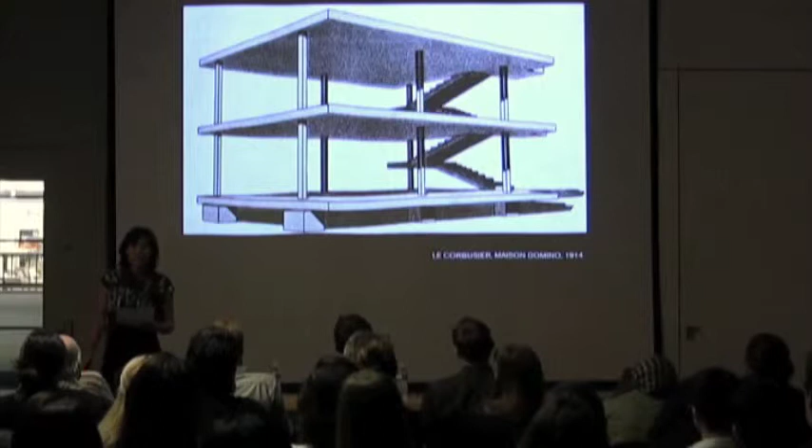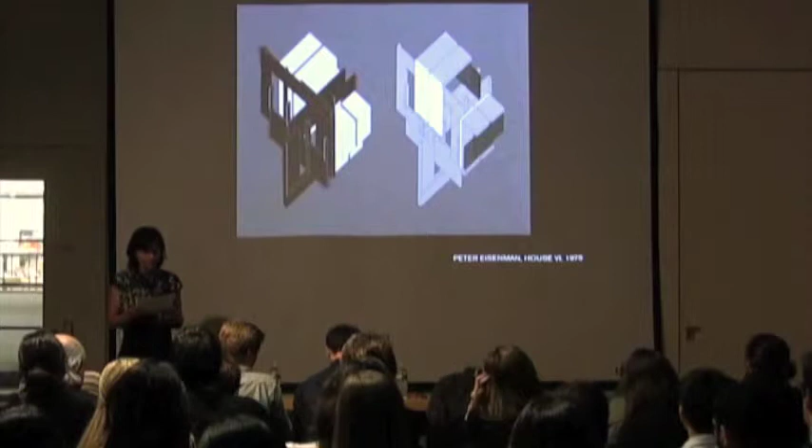Despite the last contestation of meaning that was produced by postmodern thinking in the West, where a large number of architects brought back the question of symbolic representation in an effort to undermine modernism's claim that form followed function, either through postmodern architecture's renewed commitment to symbolic meaning understood as relative, referential, and historical, such as with the iteration of its architectural elements, or through a re-engaging of the urban landscape as one of signs and symbols, or through deconstructivist architecture's untangling of the relationship between form and function, rendering stable meaning and functional legibility impossible, either replacing the legibility of symbolic reference by a legibility of process through formal deconstruction, or again, through the unlocking of the form-function equation by focusing on function as event, to be reinvented and often represented as a fragmented and destabilized body, such as with Tschumi's work.

Or again, by flipping the modernist plan into a section that allows an endless ability to produce surrealist effects, a manifesto against the conscious production of collective meaning, as it both connects and separates highly disparate programs.

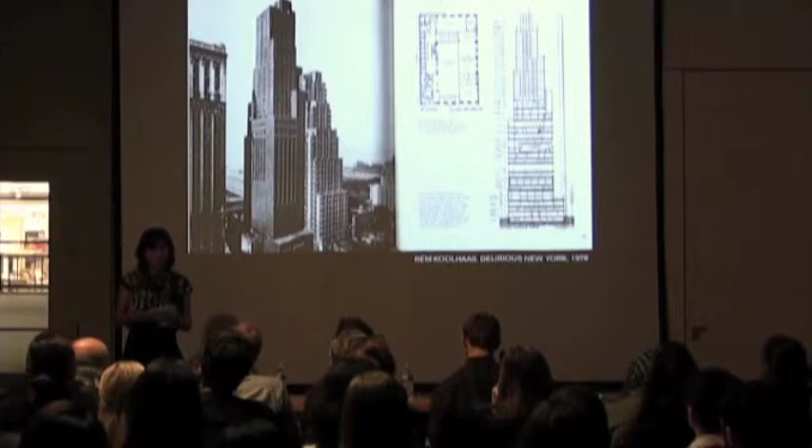Interestingly, 1978 is the same year that Delirious New York was published, and Edward Said publishes his Orientalism, which instead finds and deconstructs meaning in all of the representations of the Orient, always and collectively depicted as inferior, irrational, and only animated by religion.

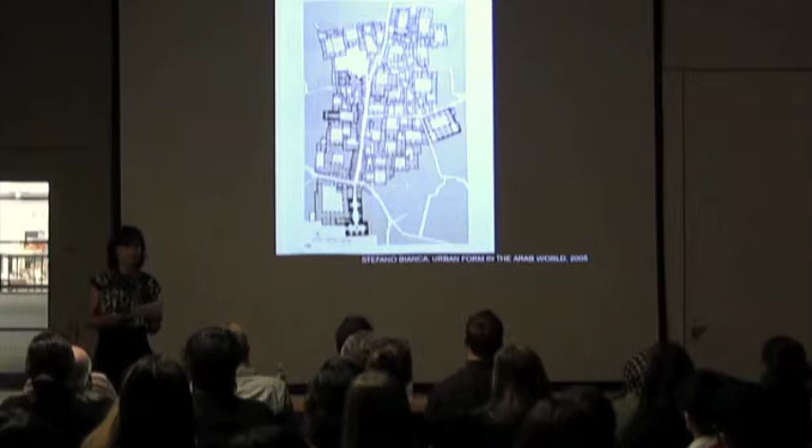So everything from interior work to entire cities is defined by this lens of the religious. Today, with the prevalence of global practice, it seems that meaning is again everywhere, but nowhere engaged as critical discourse, with no clear debate as to the content that we as architects continue to produce.

We all know the drill. In China, you either try to produce a kind of figure 8 or a symbol that means the people. You can engage with stadiums as the metaphor bird's nest, the building as a kind of sail, evoking the historical past of fishing for pearls in the Gulf states. In Africa, you go tribal patterns.

And even when meaning is not intended, it is expected and projected onto contemporary production. This situation is particularly bad, I would say, in the Middle East, where orientalizing plans and buildings - for example, a museum as flower of the desert or as oasis, the contemporary city as traditional Arab city, and the idea of the pattern no longer generative but entirely decorative, etc. The condition has become really absurd.

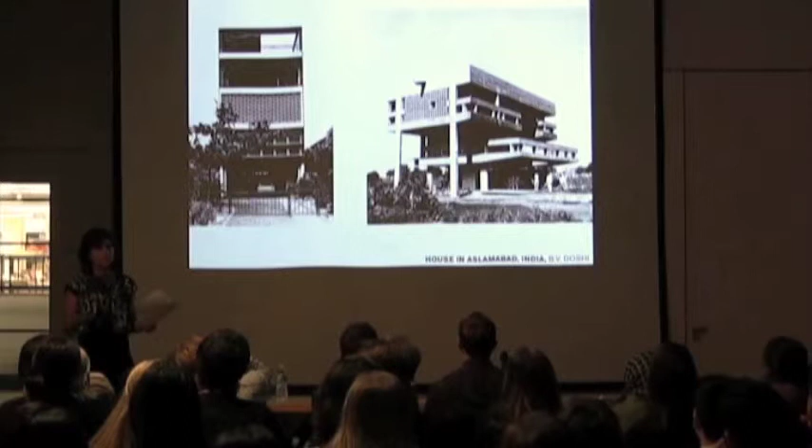This condition of patient negotiation, of exchange, of subtle etiquette, a mix of idealism and pragmatism, and slight compromises that come to new resolutions and new positions that go beyond the first two that are already known - this condition I'd like to describe as diplomacy, which is often for us represented by some of the more beautiful embassies that negotiated cultural difference.

The condition of diplomacy and representation, as embedded within an imperative of cultural diplomacy for architecture, is not one of unconditional engagement.

For us specifically, and for the past 5 years, this conversation has revolved around the environment, or at least an idea of representing, exploring, and possibly reinventing the relationship between the urban, the rural, and the natural as they intersect with the architectural.

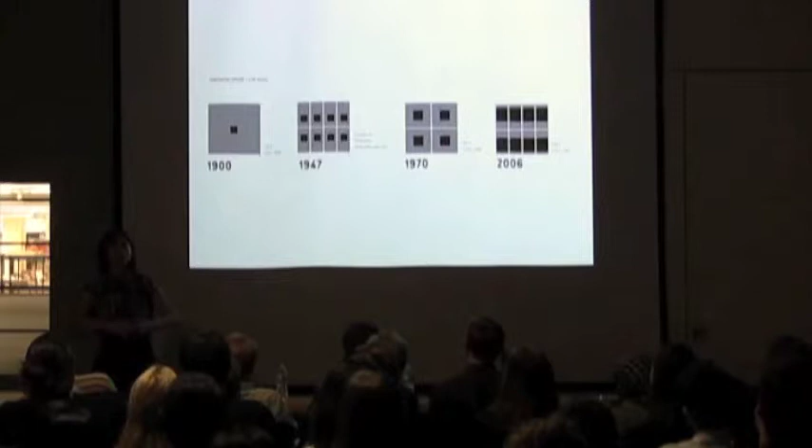Some of the ideas we were interested in was really understanding the relationship between the built and the unbuilt in the way they evolved, where the ratio of green to gray, what each house comes with as a lot of green, has evolved to become incredibly dense, where the scale of the house and the scale of the green have gone in opposite directions.

The second important point was how could we expand the typologies of housing in the typical American suburb, which are quite limited and usually dictated by mortgages and banks, etc.

So Keizer is a typical American suburb, as you would imagine it, a sort of bedroom community for Salem, which is the capital of Oregon, and also for Portland, where people commute to quite often.

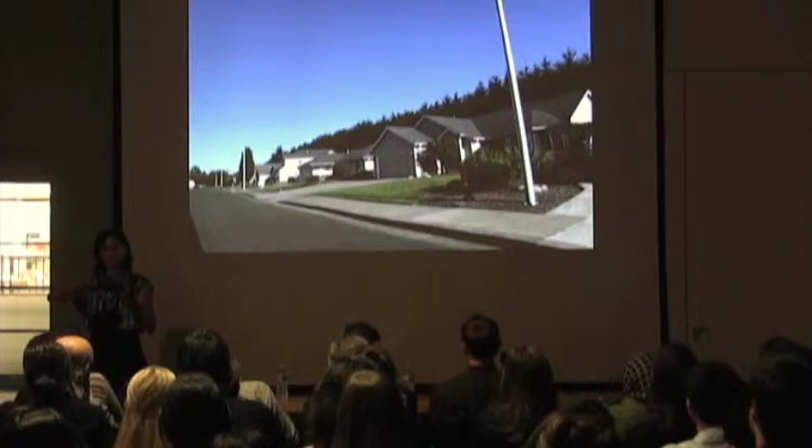It was also very interesting for us because Oregon is the only state that works with urban growth boundaries, and you can still read it in the landscape, and that was the site we chose. The problematic that was interesting for us is that at the time Keizer was in negotiation with Salem to expand the urban growth boundary, with the idea that 13,000 people were going to move to Keizer in the next 20 years, and that they didn't want to densify.

So that was an obvious problem. Could we maintain the quality of life that people who move to Keizer want while densifying and maintaining the urban growth boundary, which is kind of ground zero for a negotiation between the urban and the natural, as we would like to claim it is, or it should be.

Here you can actually see in Keizer that urban growth boundary and that strong edge really functioning. Our site was a shopping mall that had been developed in recent years, so it was easy for us to imagine an alternative to this.

So really thinking about the idea of density, of edge, of a strong negotiation between the built and the green, we imagined that the minimum of urbanity would be 2 streets, and that if we took the grid as the sign for the urban and stretched it, we could create a diagram of grid, green, grid, green, grid, green. While the grid was working in the east-west direction, the north-south would be much thinner and more natural, where the green would be able to pass over and under and create a new type of grid.

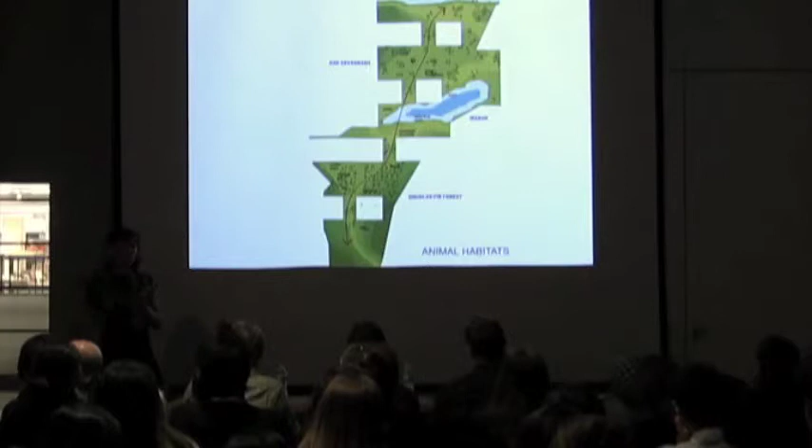That was the kind of numbers of what we were able to create with that diagram. Here you see the idea of the north-south green movement versus the east-west, much more urban context.

The idea was also to try to differentiate the green, so it ranged from landscapes that would need very little tending, quote-unquote wilder, to a series of much more domesticated landscape connected to different typologies of housing, creating diversity not just of housing, but of landscapes within each kind of block.

The section became very important. How do you pass nature, quote-unquote, underneath, over? How do you embed it within? That was one of the main pieces that was developed.

And here you see each block highly diverse in terms of the typology of housing that was created, but also the typology of green that was inserted within.

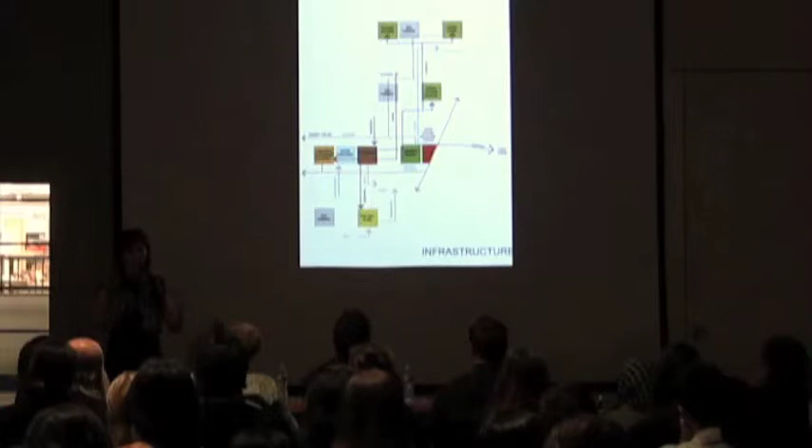The idea also for the housing, in terms of diversifying the typology, was that each housing block would also double up as what we call the ecological infrastructure for the site. Meaning if you were going to live in a much more natural environment, you would need to do work for that to be sustainable. So everything from composting to a fuel cell plant to geothermal capabilities - the housing was also the infrastructure that allowed the whole development to exist in an integrated way.

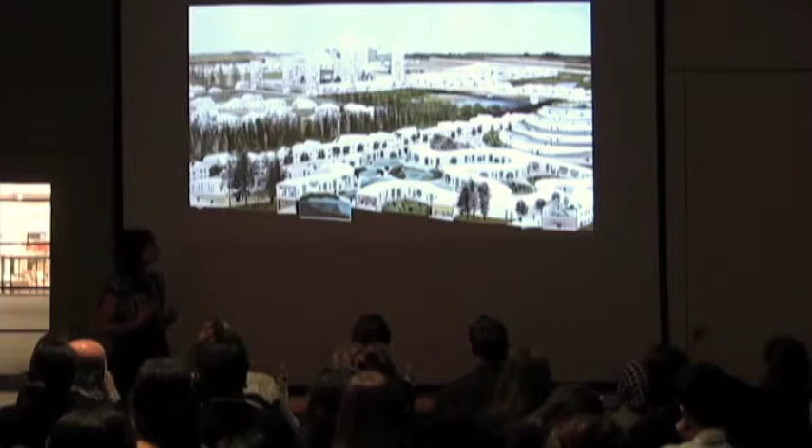That idea of housing as infrastructure generated these new typologies. For instance, this was the water filtering system where instead of a lawn, you would have a pond of water that would also filter the water, so you have a view on the lawn and a view on a little pond.

As you can see here with this thin ribbon negotiating the green and the water - looking at distribution of water and densifying right at the moment where trains would come.

We had the water towers where the pressure of the water would be created by the interior of the water tower as the water fell. That was a way to reinterpret the core and expand it to become much more of an experience of systems and a celebration of them.

Again, working with the typology of a typical suburban home, but now stacked, either stacked or compressed. The big compost mound was where all of the organic waste would come, be composted, produce methane, etc.

That particular typology was interesting for us because it doubled where one ring would be entirely public, so you could actually go up, and the other ring would be more private. A real weaving of the two systems as you moved up - we called it the continuous dog run on the one hand, and then the more private green spaces on the other.

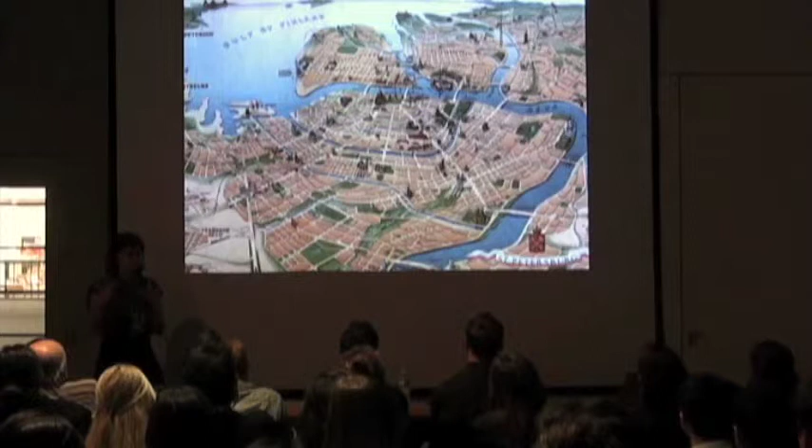Interesting triangular island, which Peter the Great carved from the city, and was always, in a way, a void in the city because it was always connected to military operations, always inaccessible to the public - this very mysterious site in the heart of the city.

It's a World Heritage Monument site, highly protected with very strict guidelines in terms of how it would be restored.

Our competition came right after another competition which Foster had won, where he proposed a huge building in the center of that void for a cultural center, and had already started to demolish some of the island's structures. So we came in with a sense that it was a void that needed to be preserved, and thought about how we could work with that idea of the void as a way to produce new architecture.

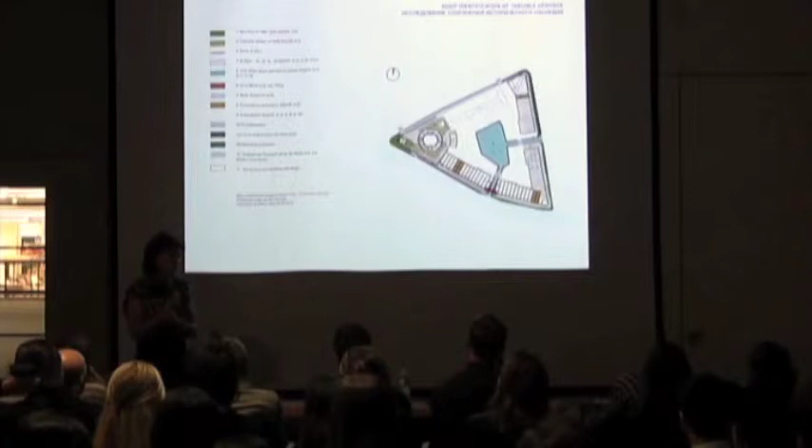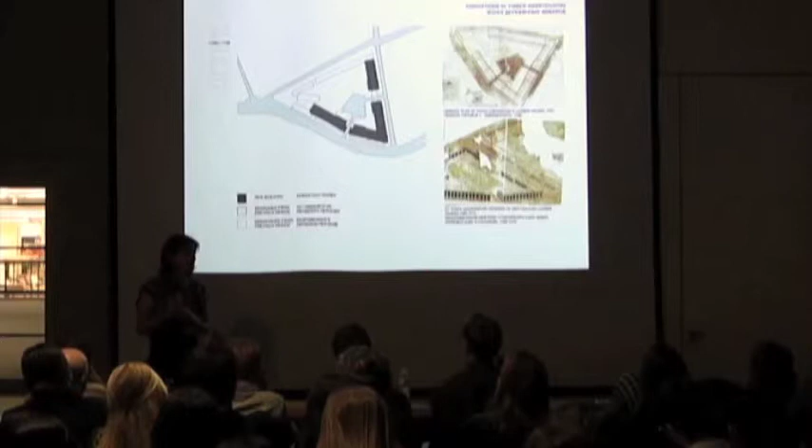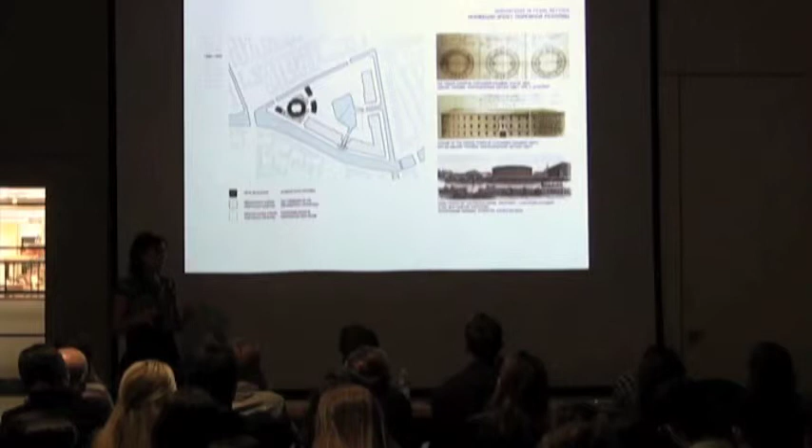Very interesting history - from Peter the Great carving it out from the city, to creating these warehouses used to dry wood for building ships for the Russian Navy. The first reforming prison, a circular building, was built on the site, and Mendeleev discovered the table of elements there, in a big lab with a big pool - one of the buildings that Foster demolished when he started work.

One of the things that was really fascinating about Mendeleev was his interest in the transformation of elements, and he was obsessed with balloons, as we discovered after winning the competition. We had actually proposed a balloon during the competition, and it was interesting for us to engage with these strategies of transformation that are not permanent.

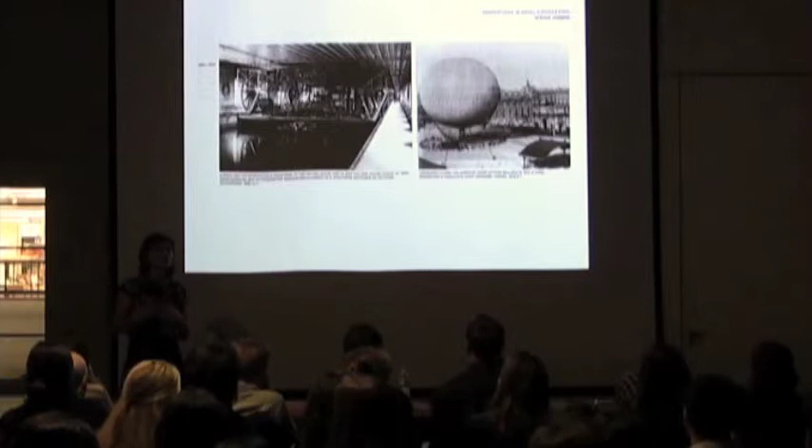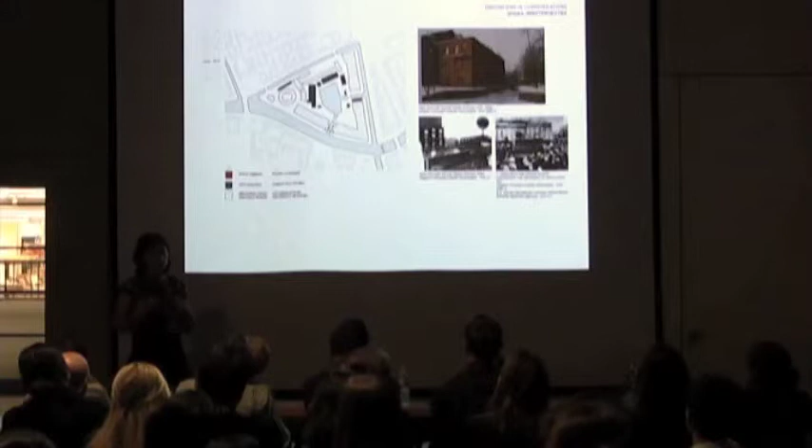This was another building that was really interesting and had gotten demolished - this was where Lenin first declared victory of the revolution, from this radio station. So there was a lot of interesting history to uncover and bring back in non-architectural, atypically architectural ways.

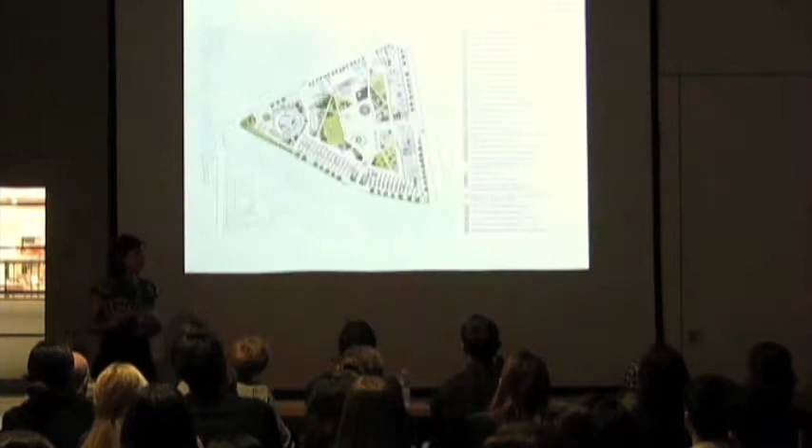Our first instinct was to really open it up to the public and create a park. That would be, in a way, the most radical gesture - giving access to the people of St. Petersburg to this island, which had been a fortress for so long, and to create this park and make it usable throughout the summer, but also throughout the winter.

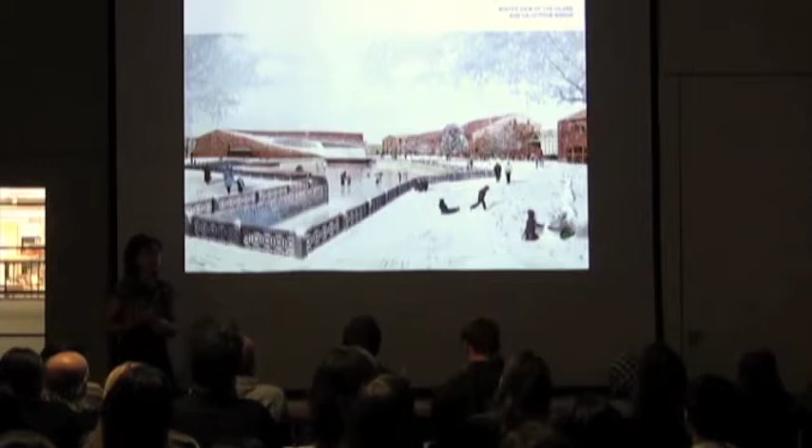One of the ideas was how to keep it alive even during winter, and how to bring the idea of the park into the interior of the warehouses. The warehouses are quite amazing because of the need to dry wood vertically - they're built with this amazing structure that creates a very intense rhythm where the wood would be placed vertically.

There was already this notion of density, and as the island was carved from the rest of the city, we could carve voids through that density to create new kinds of public spaces. So we were working in between two strategies of the void.

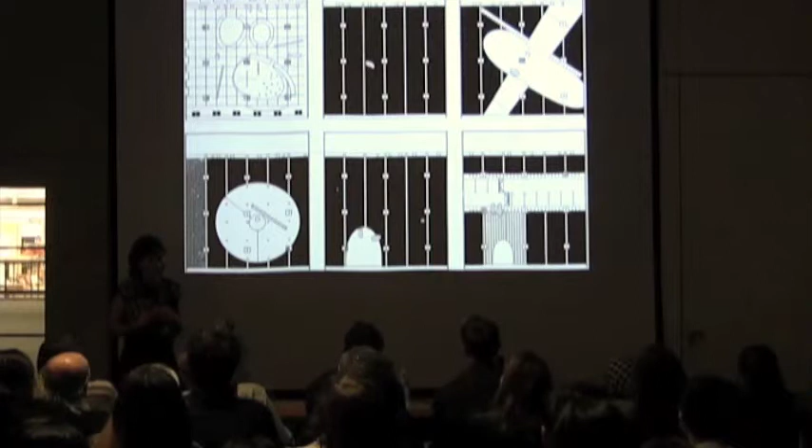The first would be Koolhaas's strategy for the void in his bibliothèque. But the second, and maybe closer to what we were trying to do, is Matta-Clark's strategy of the void, where the interiority is carved, but in a way to reconnect to the city - so it remains open, not an interior void that you simply discover.

That was really important for us - that the new carvings would actually allow for new perspectives onto the city and would reconnect the interior of the warehouses to the rest of the city.

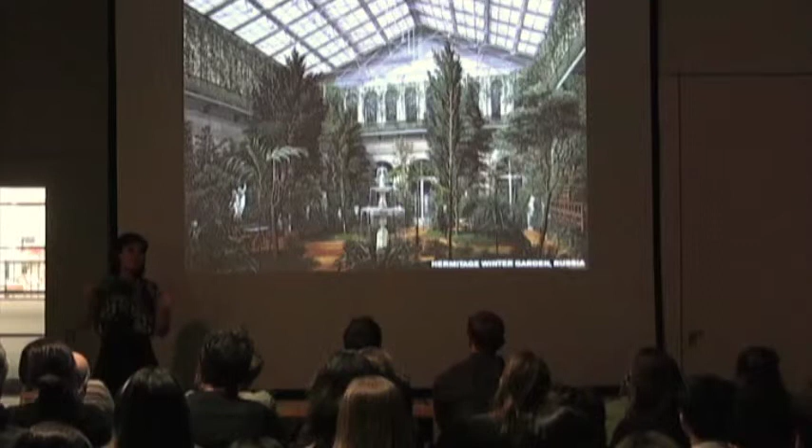There was also a really interesting tradition of winter gardens in St. Petersburg, particularly in the Hermitage, that we thought we would bring back. The idea was that by carving these voids, in the winter the park would move inside and create a new public experience, elevated, that would reconnect the island to the city beyond.

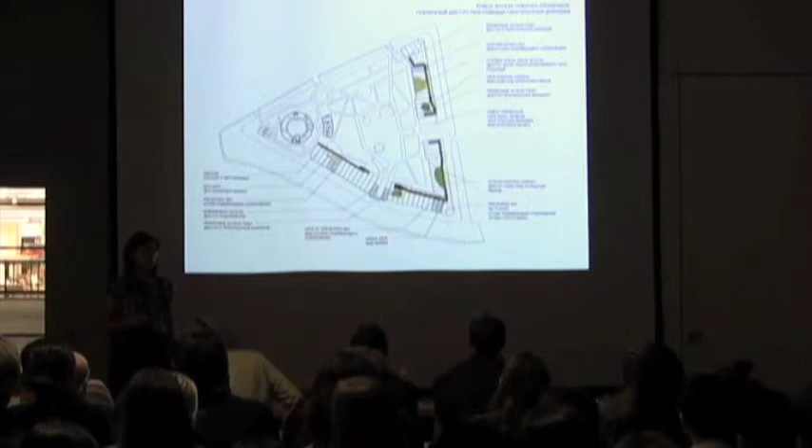That was the initial strategy for the competition - these carved voids connected with an elevated promenade, which would also allow us to negotiate with the client and create a sandwich where the ground would be public and the roof would be public, with whatever residential or office or developer program in between.

As the promenade would weave through, you would have these peeks to the outside and to the inside, enabling us to create a public experience even as these warehouses would be programmatically distinct as a result of the requirements for the project.

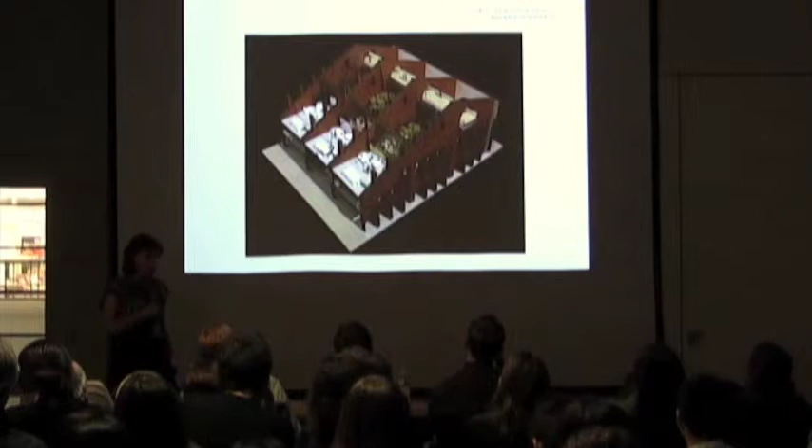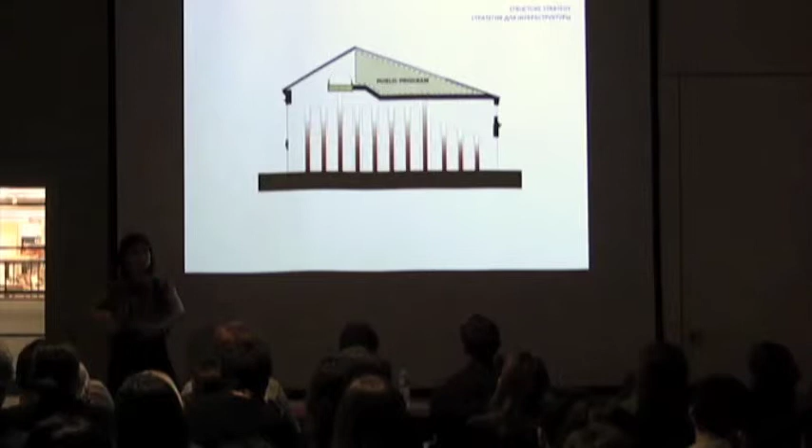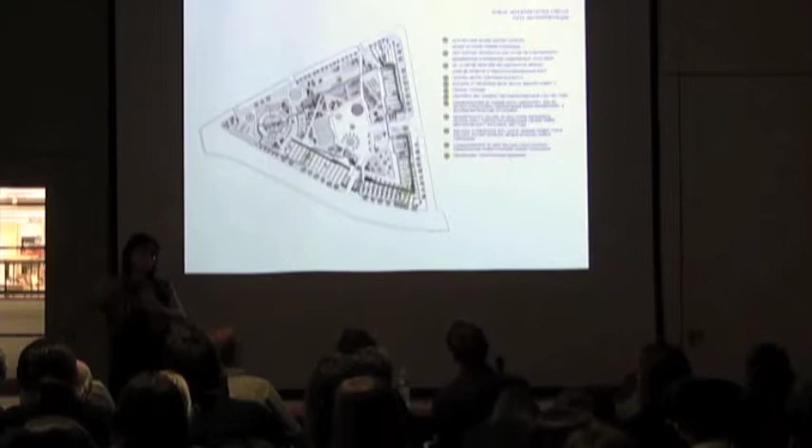The promenade would double as infrastructure, carrying people but also carrying all the systems. Being placed at the top allows minimal impact to the structure, which becomes lighter at the top. It would also create an interpretation path, so as you move through the buildings, you get a sense of the history of the radio station that had disappeared, with different views onto the island and into the city.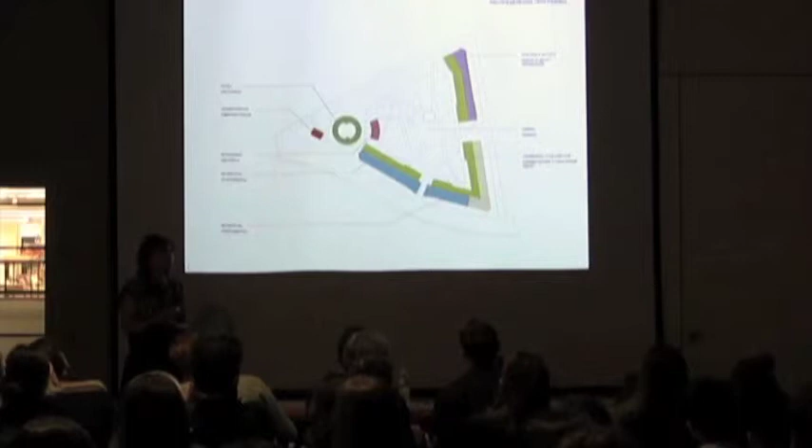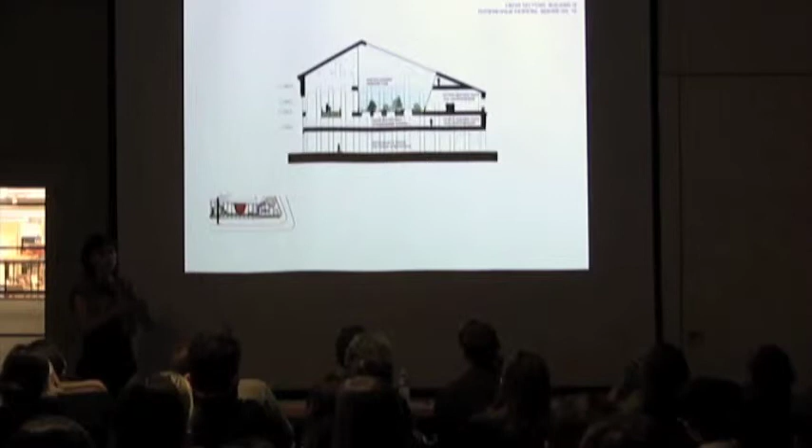This is a sequence of spaces connected by a line that crosses the thicknesses and creates a sense of continuity, even as the program from offices to culture to residential creates difference. These are some of the plans showing the very dense rhythm of the walls, but also the sense of openness at the top. Here you see the incredible rhythm of existing architecture and thickness.

This is where the promenade becomes an arcade at the bottom. One interesting aspect of the project, in negotiating with the city, is that we initially proposed this only as a kind of park that would become a landform allowing for seating in the open part of the city.

Of the island, but the landmark commission came back and said they believed the island should maintain the sense of the ensemble, being closed and different. So it became a negotiation between the outside of the island and the inside, working to carry the ensemble and close the island again with the building, but connected with the park, giving us part building on the city side and part park on the island side.

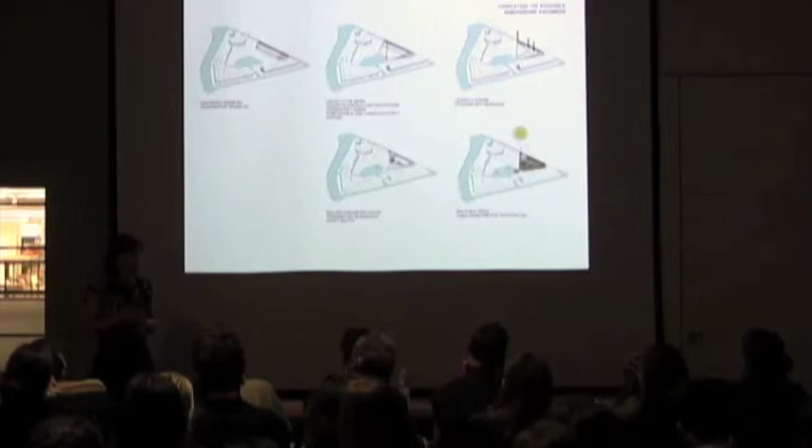This was designed to hold both seating and also the platform for that famous balloon, which we wanted to put there from the beginning to create the possibility of elevating and viewing the city from above, without building the Gazprom tower, which was a scandal at the time.

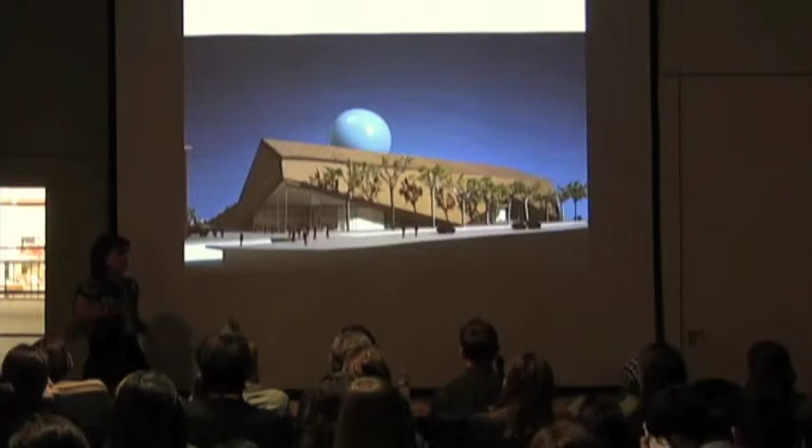Here you see the park side and then the city side, where the building is articulated to allow for entrance, but also articulated to really carry and close the island again in terms of the profile of the roof.

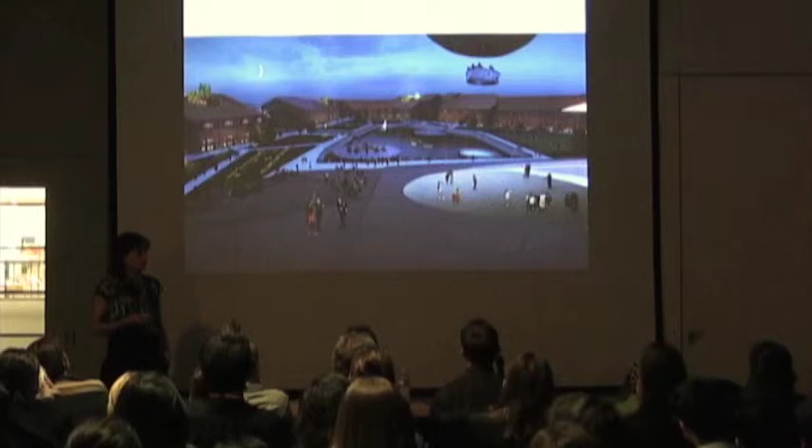The next project is another cultural project, the competition that we lost for UC Davis, a new museum, which also involved a similar negotiation between building and green space, but also between a highway edge and the campus. UC Davis's campus is incredibly green, and the site right on the edge, negotiating that boundary between the highway and the campus, was quite interesting.

Well, not that interesting, but it could possibly be interesting as we tried to use its simplicity, but also engage with this negotiation between the highway and the campus to open up a maximum of front open space while creating a strong edge on the highway side, and also to create a possibility for negotiating inside and outside climatically with the perforated canopy.

What was interesting about that particular form or shape is that as it rotates, it gives very different perspectives. From the highway side, the idea was that it would be quite monumental and almost undifferentiated, where the scale of the windows would be quite large. Then as you rotate, it would come down to the ground and be much more inviting in scale, and finally from the entrance it would really open up.

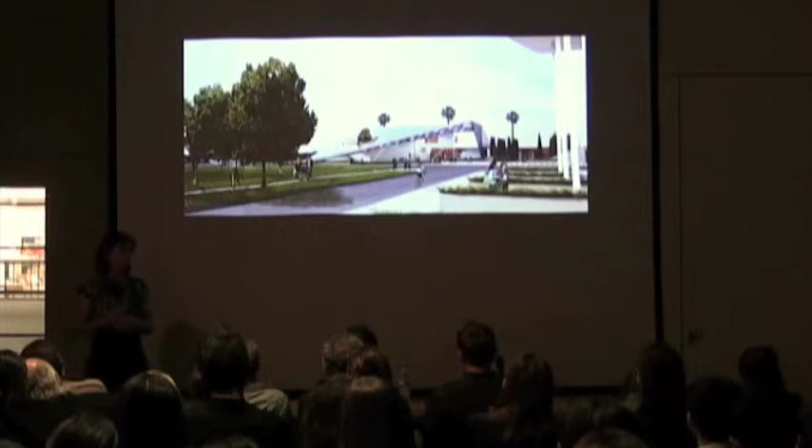So even though that shape was quite simple, it allowed for quite a lot of different perspectives, and the canopy at the entrance would negotiate the temperature change from inside and outside and create shading.

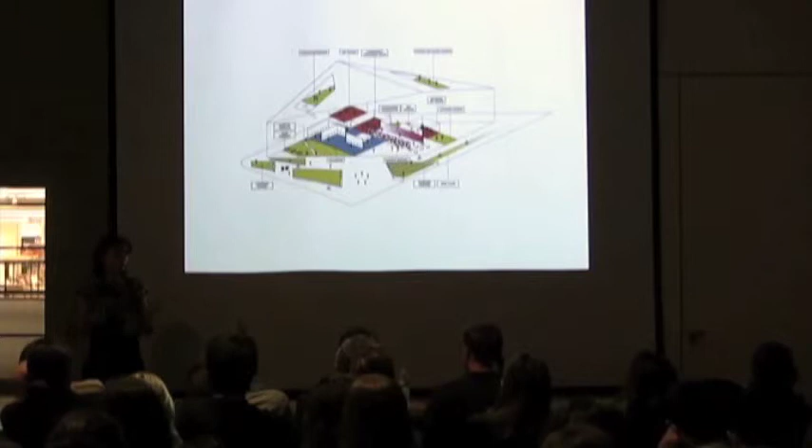The interior was also a negotiation between more formalized gallery spaces and more informal art spaces. The museum really wanted to attract more students to come. So while on one side you had the formal gallery when you entered, you would also have this stepping new type of display space where students can hang out, but also where new kinds of art could be displayed—much more informal and engaging.

Again, with the incredible temperatures and climate of UC Davis, the idea was really cutting through the building with these large green lines—complete openness cutting through, perforating it both at the ground level, with a view all through the building and outside artist spaces to spill out and work, and also another cut at the roof level that would connect the more informal working spaces for the museum.

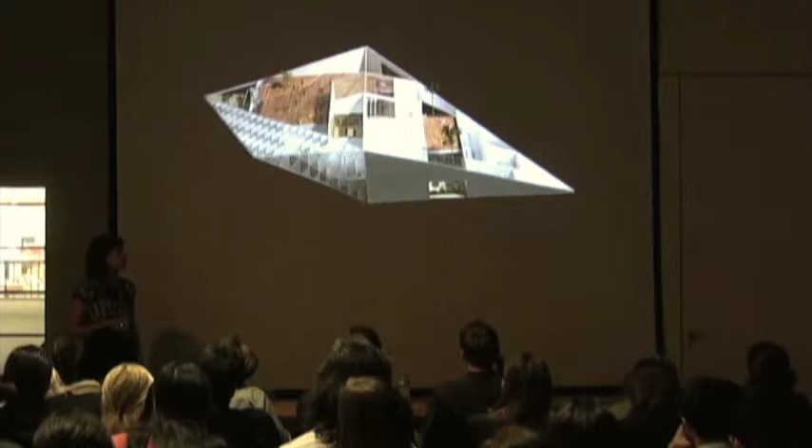The next project is one where, again, we looked at a different kind of negotiation between architecture and landscape. This is a competition we did for the National Mall for a new Sylvan Theater, working with Diana Balmori, the landscape architect.

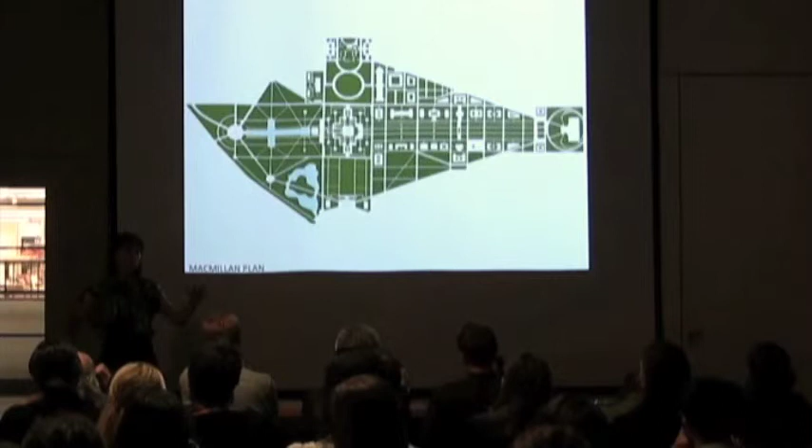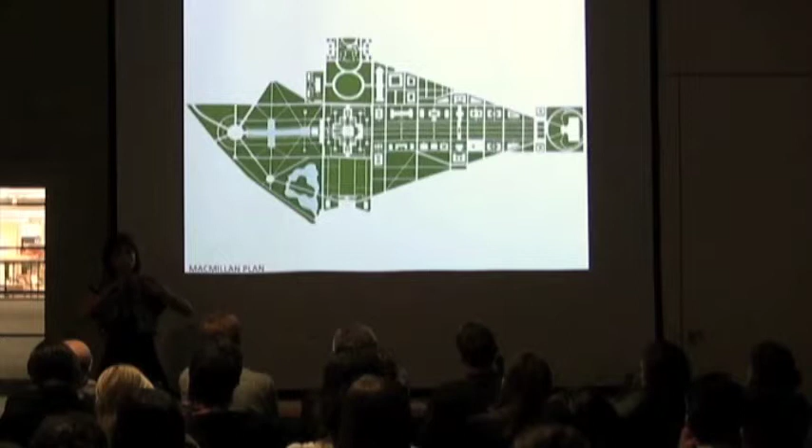There are many interesting aspects of the mall, but three we were particularly interested in. One was that it had always been a kind of flooding zone, and that environmental concern had never really affected what was designed on it. Two, the visible story is that the mall is really a negotiation between the Macmillan plan, very formal and classical, and the more picturesque Downing plan, much more romantic. You can feel it on the mall.

We wanted to enlist both traditions in the project, and also it being a Sylvan theater—Sylvan theaters are really interesting because they are sort of clearings in forests, moments that you discover. We wanted our new proposal for a Sylvan theater to have that same feeling of discovery within a clearing.

The program was a kind of new little restaurant and exhibition space, visitor center. But for us, it really became about how do we put a structure on the site that's not a landform building that hides the architecture, or at least finds a way to hide it in a new way.

We started with the idea of carving the landscape, really shaping it to create the amphitheater part of the Sylvan theater. So that's the kind of clearing moment.

Then we worked with the idea of a path and a line, where the line of the landscape would become the wiggle of the building, and then would continue to become the line of the landscape that would connect you further to the park.

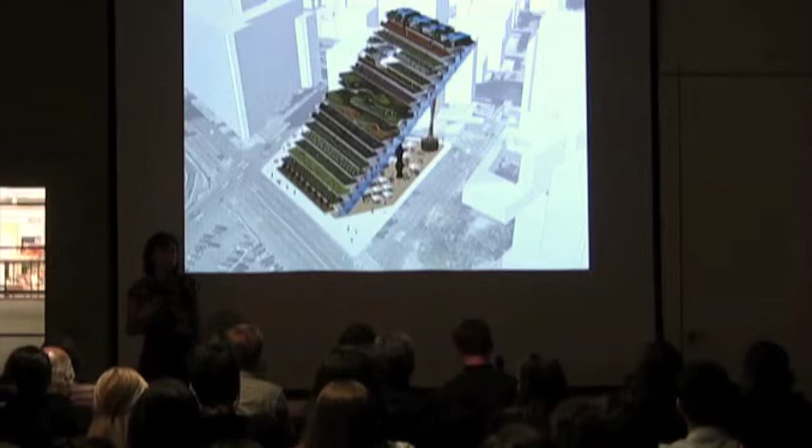Continuing with the architecture and food idea, which we've been working on since winning the 2008 YAP competition at PS1 MoMA, where we proposed a kind of cardboard farm tube, a quarter acre of organic farm, to some of the other more visionary propositions for new condominium buildings in New York.

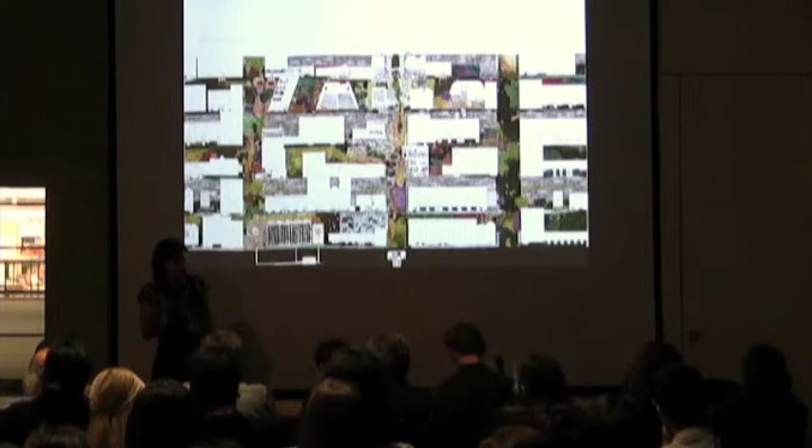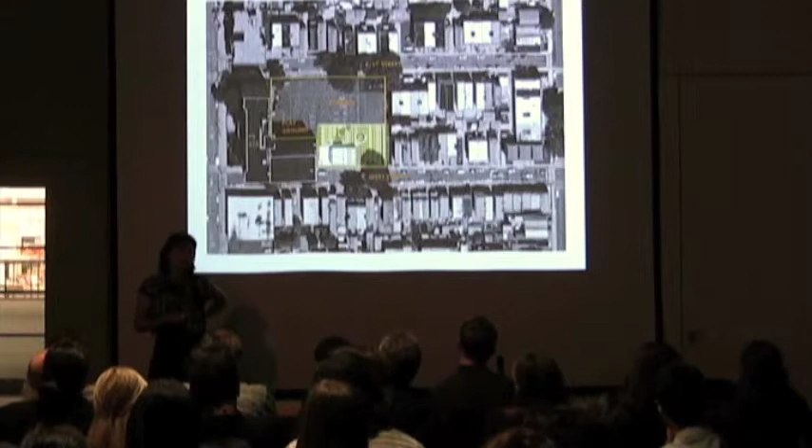Ideas of fish farms, etc., or transforming an area of Brooklyn by negating the streets to become entirely farms. So we've been working on that for some time. As a result of PS1, we were commissioned to do a series of edible schoolyards in New York. The first one was just completed in Brooklyn at the public school called PS 216.

We started with the garden, which was really interesting in the sense that the children were able to engage with the garden before the structure was built.

The first structure was the outdoor kitchen classroom that they worked with for a year or so before we designed the actual building itself, which is a greenhouse, a kitchen classroom, and what we call a systems wall.

The idea, talking about pedagogy, was that this would really be a tool for kids' engagement, almost a pedagogical tool, where everything was shaped to explain how things worked.

So the greenhouse and the building roof follow the same slope, where the water flows from the greenhouse to the roof to the cistern. The cistern is circular. The compost is in the systems wall, the tool shed as well. All of the systems are contained in that systems wall, and the sense of connection between the garden and the building is experienced throughout the use of the building.

And that's the building complete. So here you see the Russian doll of the greenhouse, the building, and the systems wall, and the garden in the winter, which is not very green in this drawing. And the systems wall is kind of tall and short.

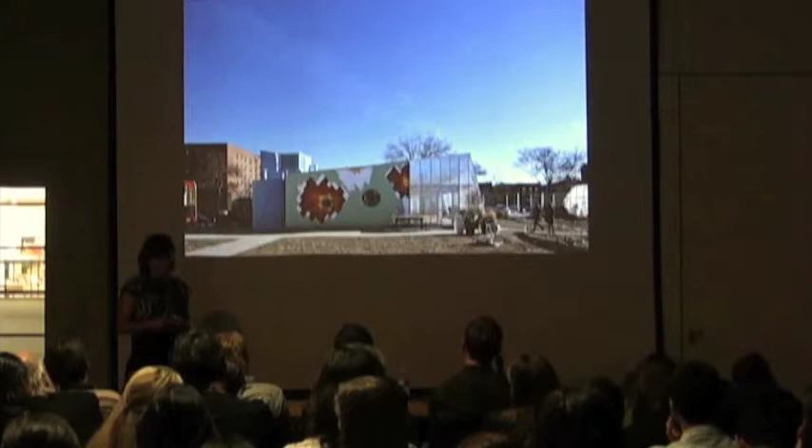And so we reinterpreted that pattern and used residential shingles that are stacked slightly differently, to create a pixelated version of that Venturi Scott Brown best store pattern, which you see here.

And that's the greenhouse. What's really been fun is that it's really a classroom. It's integrated within the curriculum, and so when kids learn about a certain culture, they come and cook the food of that geography, so it's very integrated and part of the school.

How are we doing on time? Are we okay?

So lastly, architecture and diplomacy is the competition we won two years ago to design a new conference center in Gabon, in West Africa.

The project's mission, let's say, was really to create a new diplomatic center, mostly for the African Union, but also for diplomatic conferences that Gabon will host in the future, as it is an emerging country and wants to claim a sort of political importance in Africa to become a real player.

How to represent Gabon was part of the question, let's say, of the competition.

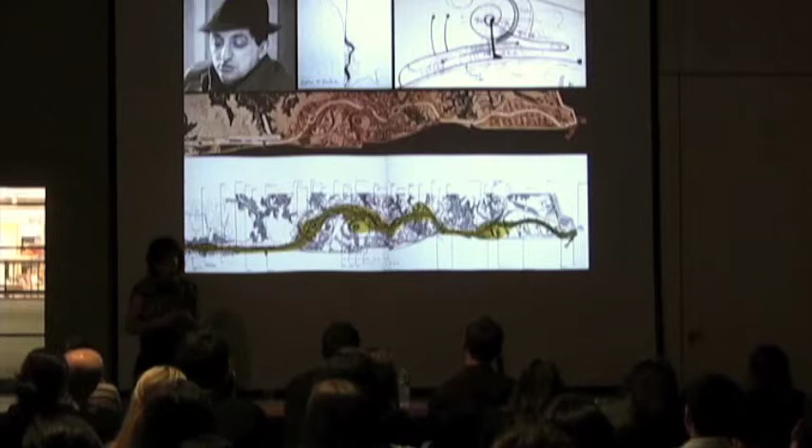And so here you see his way of creating that sort of integration. He designed this incredible open-air market that unfortunately was recently destroyed, but was appropriated for a lot of fun events in a very informal way.

The site for the project is a diplomatic park which sits above Libreville, so you see the city from there. The actual site of the building is on one of the higher points, so you can really see it as you come up from the city into the park. The first sense was to create a building where the roof would be one of the main facades, because that would be what you'd see as you come up.

The idea was to embrace this idea of representation, but represent the country through its landscape. So the architecture is carved with 5 courtyards - 3 larger and 2 smaller ones - where each courtyard represents one of the ecosystems of Gabon.

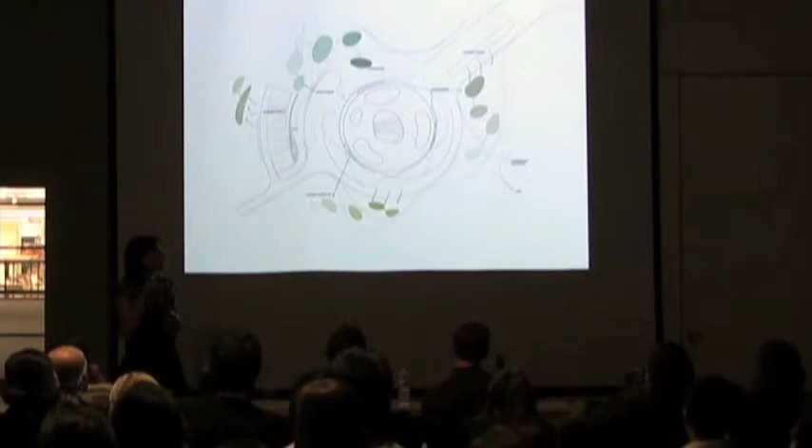Through that carving, we integrate the building with the landscape around through the management of water. The water is collected on the roof and then used in the courtyards, filtered through different small ponds around the site, and reused inside the building for grey water, toilets, etc.

This is the entrance view, the more ceremonial entrance view, and the idea is that the negotiation between inside and outside also carries to the facade, where it's a double facade. The outer one is made of louvers creating a sense of transparency, and the inner one is more closed and opaque. This is a mock-up we did for the facade.

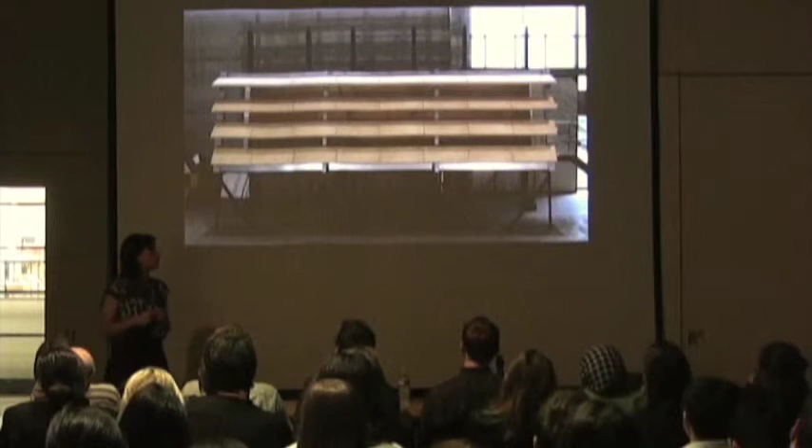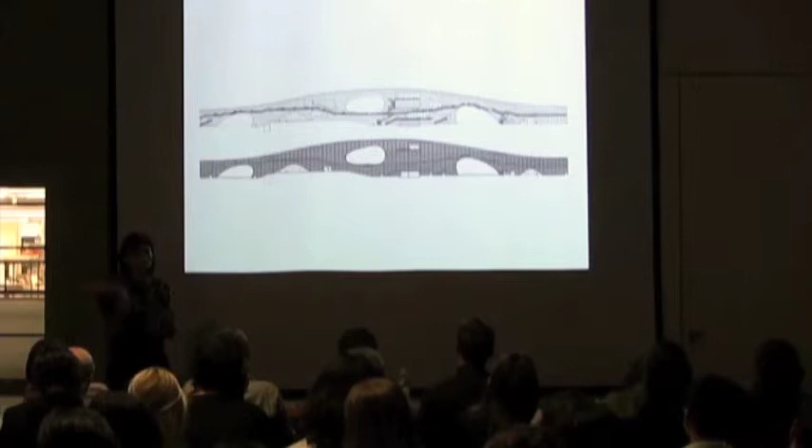Here are the voids and landscapes on the facade, and in between the two skins is this kind of promenade, which we thought would be really good for informal meetings. So after being in one of the conference rooms for a formal meeting or presentation, you could take a walk around the building and resolve problems diplomatically.

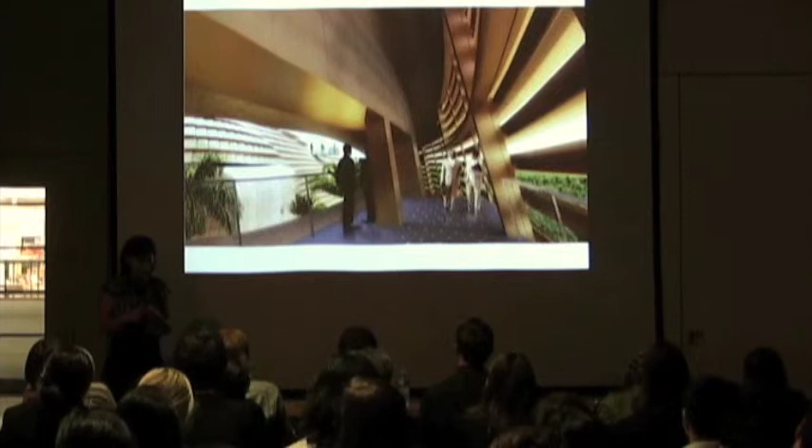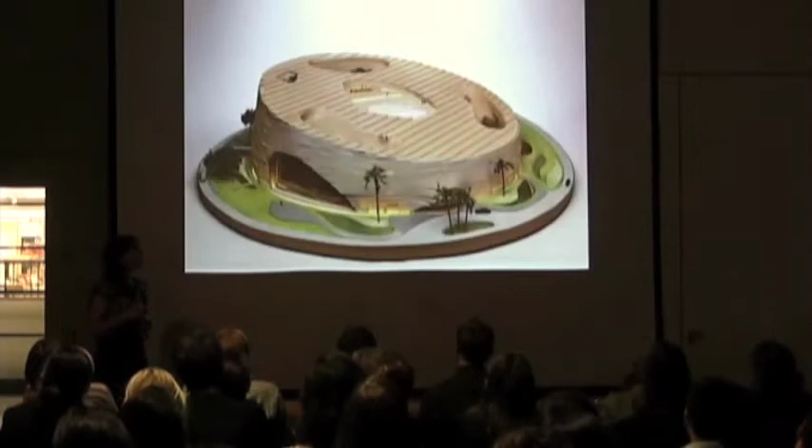Being in between the two skins, you can either look out onto the landscape beyond the building or look in towards the courtyards. The entire double skin is negotiating entrances and perforations, etc. Here you see the two skins and then the topographies and the courtyards - each one is quite specific and breaks the abstraction of the big circle.

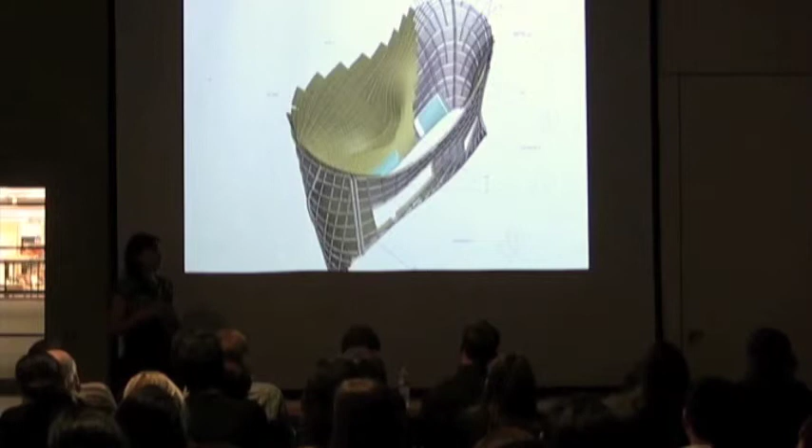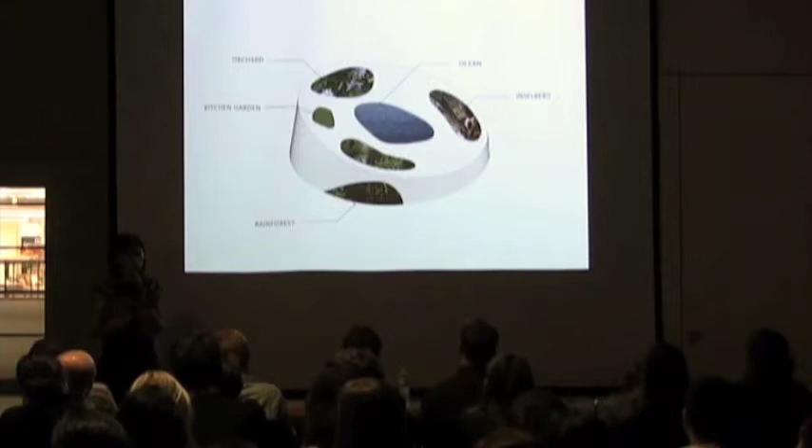This is the waterfall courtyard, where the water comes to be filtered, representing the rainforest landscape. You also have the Inselberg courtyard, which is drier and more stone-like, and then the orchard where we're growing coffee and other agricultural species. So that's the waterfall here.

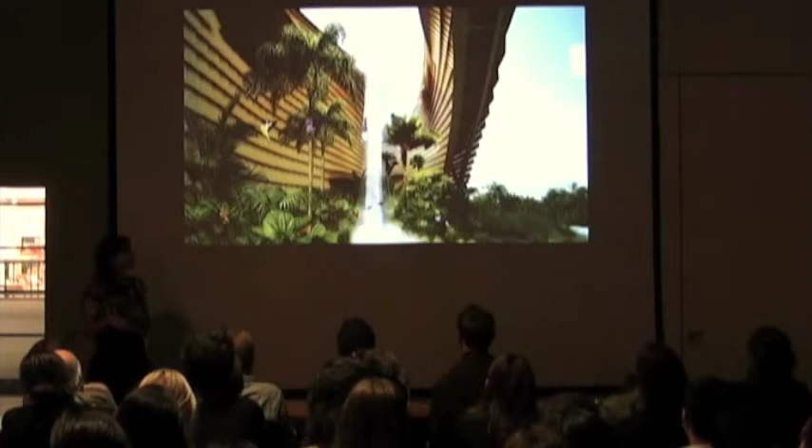This is a mock-up we did in Vermont, where we calibrated the shape and form of the water falling, and this is again the Inselberg, the drier courtyard. The orchard one is more suspended, and each courtyard eats up at the perimeter of the circle.

The in-between space is very open, and in the middle is the main auditorium caught in this hexagon, which is actually the trace of the conference center that was there before. We initially proposed to preserve the existing conference center and build around it, but as the project developed, it became more and more difficult to keep the structure, so now we just have the trace of it.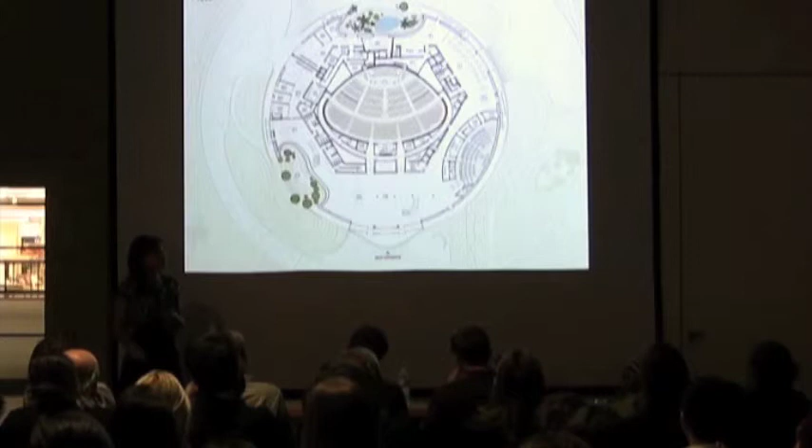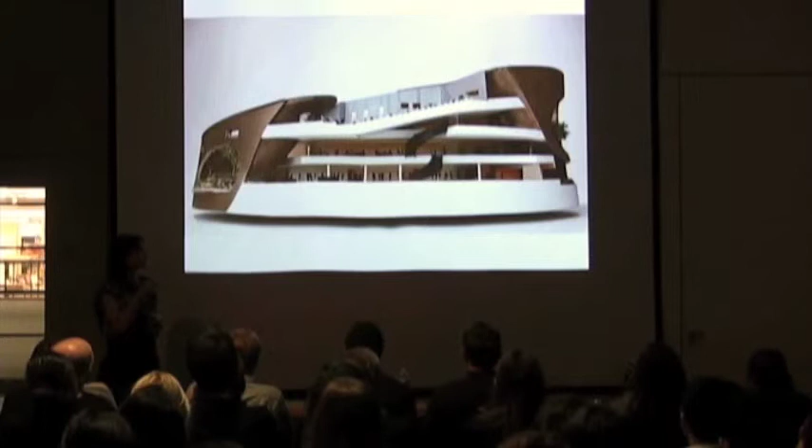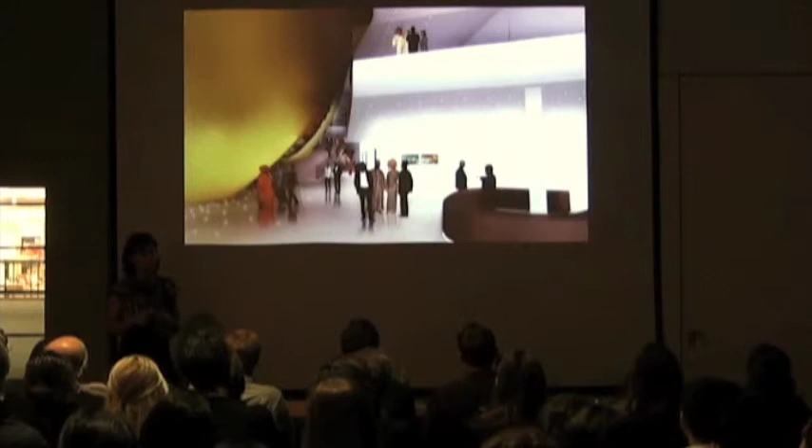Here you see the courtyards interrupting the much more undifferentiated white space between the hexagon and the courtyards. Here's the lobby, again with a more modernist feel, but with the surprise of the underside of the courtyards, using the hexagon as a kind of lantern to light up the surface of the gold of the courtyards.

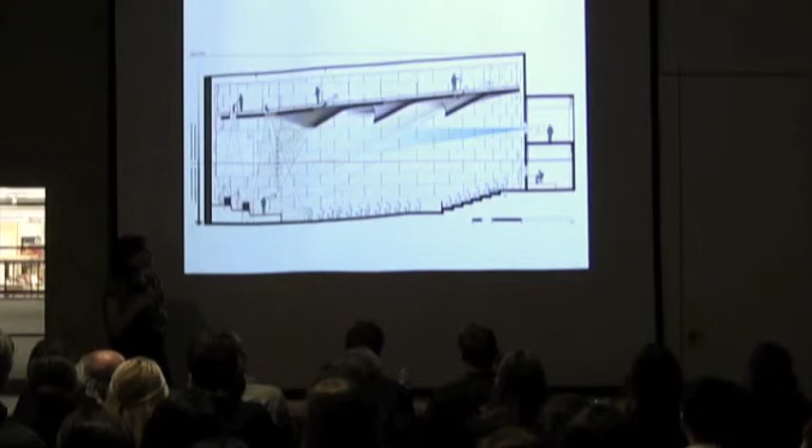The feeling of the outside carries to the conference center, where the roof is a sort of inverted topography that resonates with the water being collected here at the top. Each venue inside is thought of as being connected, both literally but also in terms of atmosphere, to the courtyards outside.

So under the orchard, the auditorium is below - you are on the orchard garden above, and in the auditorium you experience the weight of the earth above you.

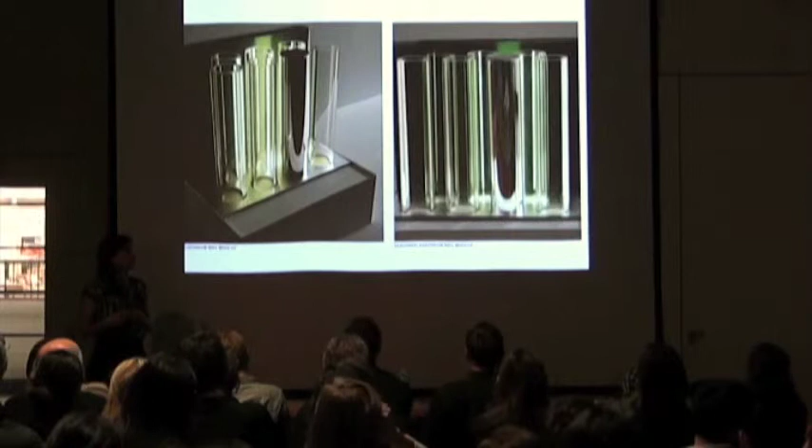This is the rainforest auditorium, working with glass tubes to create a sense of a clearing. The Inselberg has a view onto the Inselberg auditorium garden. And finally, the only one that's not connected to an actual garden is the press room, where the geometries of the facade, which is a kind of cone, and the geometry of the room intersect to create this sort of Turrell-like shape at the corner.

So there's a kind of registration of the two geometries. And at the top is just the restaurant with a view onto the landscape beyond.

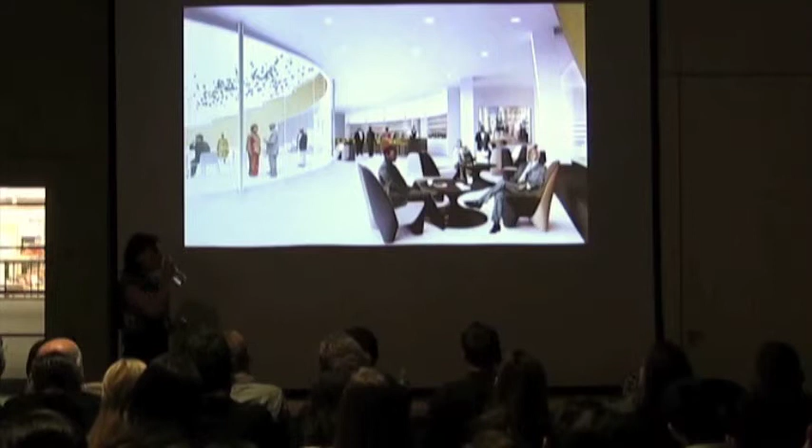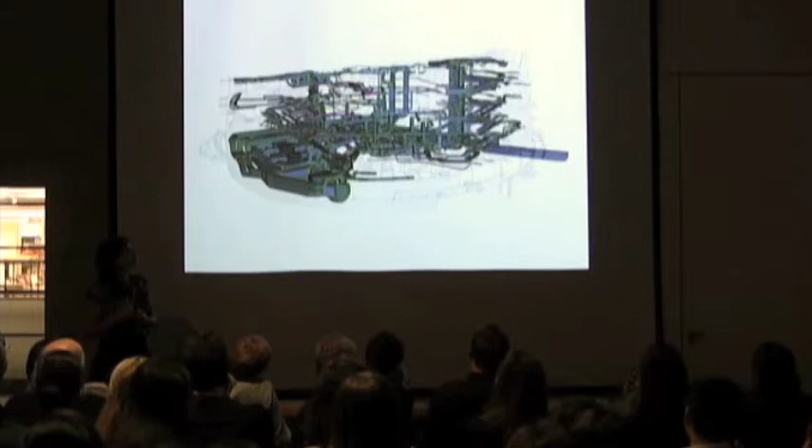And my favorite is the mechanical system. It's under construction, moving slowly, but moving nevertheless. These are the piles.

Wieden and Kennedy is the image you have on the poster, I think, is the ad agency that did our ads for Nature City. They did all the ads for Nike. They were originally from Portland, so they're interested in kind of a touchy, woody sort of aesthetic.

But since Portland, they've grown to become a kind of global ad agency network, and one of the interesting parts of the project is that they took 3 floors of a building on Varick Street, but nevertheless wanted a presence on the street. That was kind of one of the challenges.

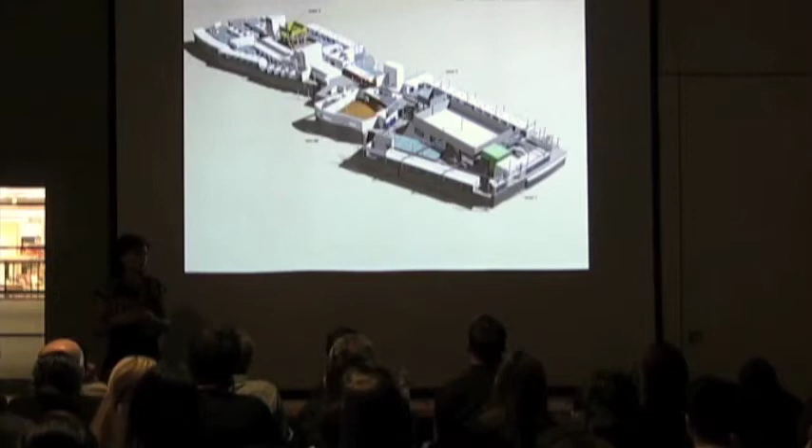So a few things we were interested in: again, density, a sense of connection between the 3 floors without necessarily creating a kind of atrium. We wanted to move away from something sprawling, like a Google kind of experience, move away from work as playground and come back to a sort of work as work.

We also tried to really study, in the same way we studied nature cities, the density of the office space, to try and increase the density of the individual stations while maximizing the kind of more collective shared space between the workers. We did that by really fine-tuning distances between desks and columns, and managed to go from 6% of shared space to 25% of shared open space in the office.

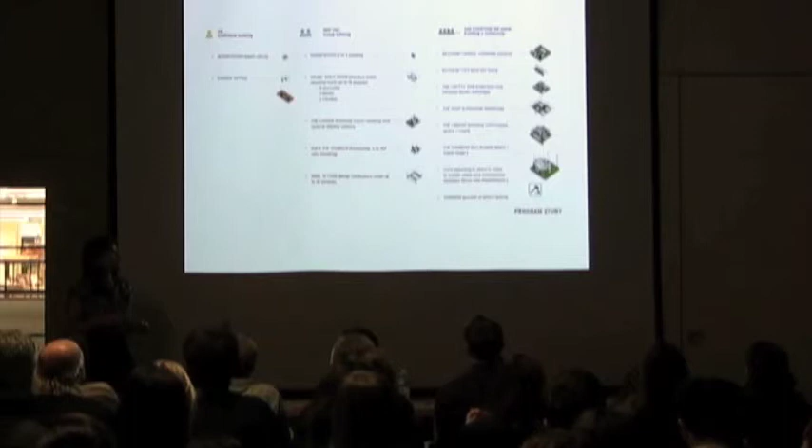Continuing with the idea of shared space, we really did a study of the meeting environments according to time. What is a 5-minute meeting? What is a half hour? What is 3 hours? How each kind of time can require a different type of meeting space, and not have the same for everything. That went from the scale of a phone booth, where you just need to make a quick call, to the scale of a whole amphitheater-like stair where you can have all-agency meetings, such as this one. So a real study of work environments.

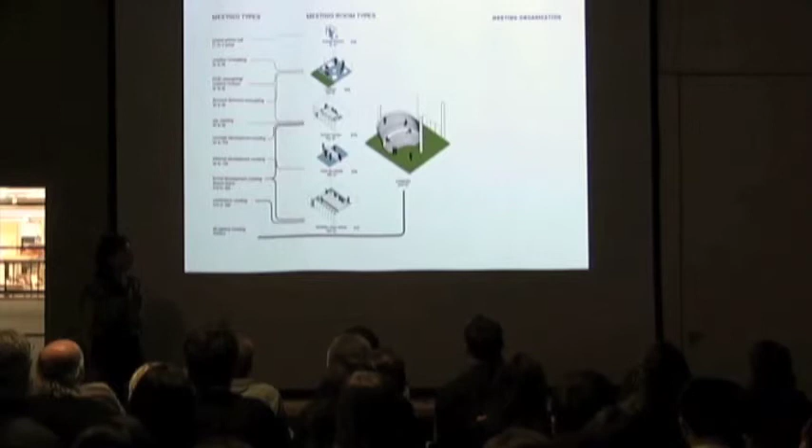So here is the project, where these are the kind of meeting rooms. These are the over-the-counter meeting tables, for the 10-minute meeting, quick meeting, standing. And these elevated areas are the lounges, which are somewhere in between - you don't need a closed room, but you need some level of privacy. And here's the woodsy sensibility that I was talking about.

What's interesting about the different elevations of the lounges is that you do have a sense of privacy, even though it's not enclosed, just by being a little bit higher up. So this is a phone booth scale, and this is a conference room - homage to the Whitney conference room with the lights. Meeting also happens in the cafeteria space.

So the meeting rooms really just structure the more open space and create these neighborhoods, where we broke down the scale so that for every 25 people, you get a phone booth, a meeting room, a lounge, and direct access to one of the larger spaces.

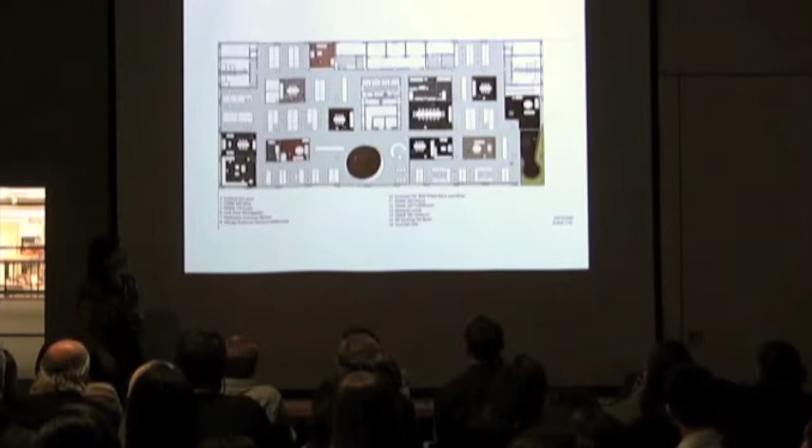And so the diagram of carving out at least 4 very, very big moments - the biggest collective shared moments out of the more generic - became the sort of diagram for the project. But also, how to connect that again without embracing the atrium, using the circle, which by now you should know, as the most efficient way to cut in between the columns.

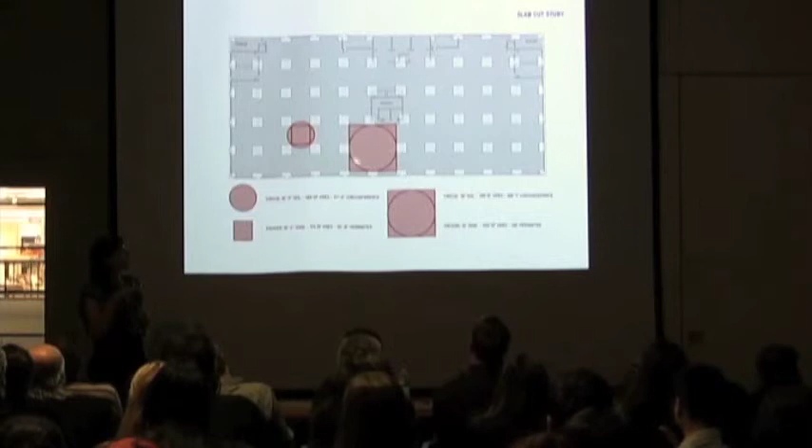Here you get the biggest opening, in between the four columns, so we only had to remove one column. Again, our Gordon Matta-Clark obsession of cutting these holes to create a sense of connection with this big stair.

This is the main meeting space for all agency meetings, very monumental and present from all the different areas. Here you see the stair—that hole connects to that hole, and that was our way to create a sense of the three floors and a sense of connection, but not an immediate, obvious one, in the all-agency meeting space.

So from the big stair you go to the bar—they have a lot of parties—and that takes you to a spiral stair, which then takes you to the library den at the top, here.

And this being an ad agency, they have a gym. We did a gym, we couldn't resist. But the gym also doubles as a meeting and black box space, where all of the seating is hidden, and you can open it up.

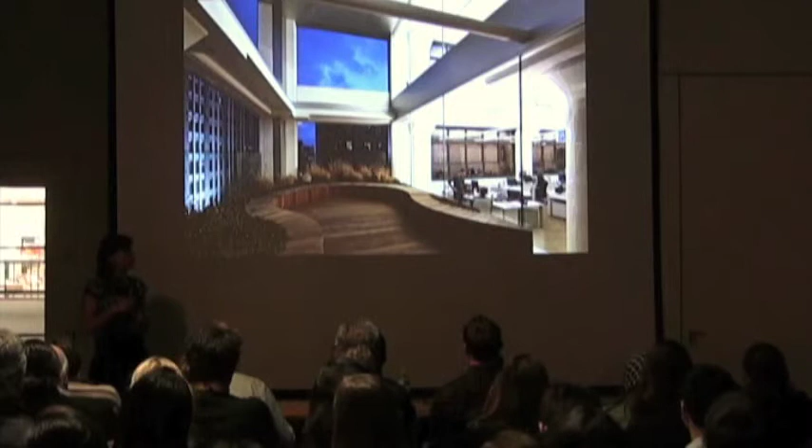Finally, with regards to the presence on the street, we moved the facade from the outside to just a bay inside, creating a double-height courtyard, which they've used for everything from working to yoga, and it's really interesting at night when they have events. You can see the building—I think I'll stop here.